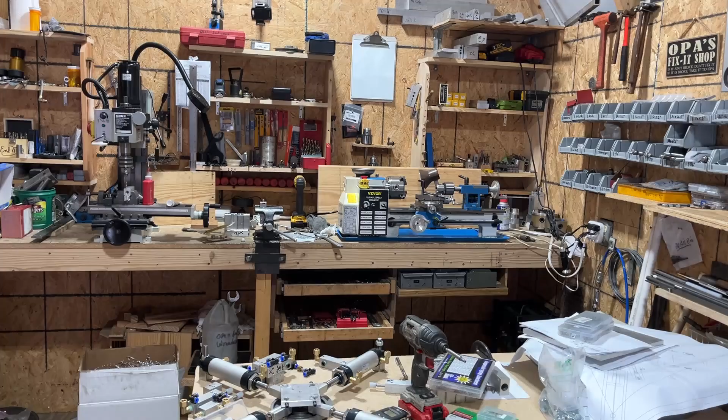Well, here we are in my shop now. And what do we got? 10 minutes after 8.

Looks like 20 degrees. Well, I'm not going to be in here very long.

Last night I was sitting in my recliner thinking, and I started looking back over some of my older videos. I got to thinking there had been a few times someone asked me about how I go about making my prototype engines, so I decided to go back and pull out the videos over the couple of months I was working on one of them. I decided to do the 4-cylinder one that I have on my lawnmower body right now.

I did some testing on it, so I've got some videos, and it's on there right now. I'm going to be working on it some more this spring. I'm going to put my pressure flow regulator on it, which I haven't had a chance to do yet, and see if it makes it any better with the new pressure flow regulator on it.

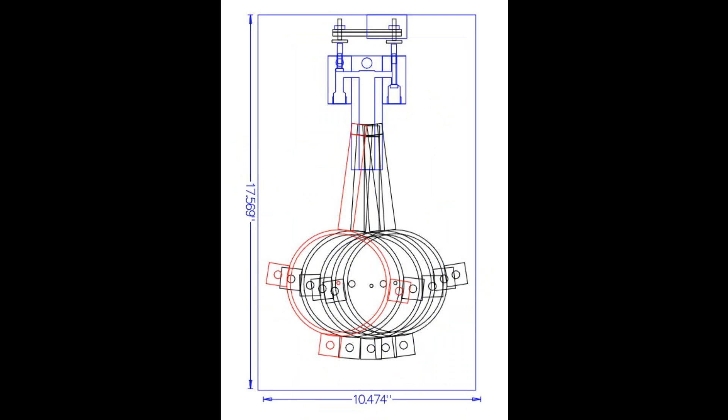Today I've been working on my valve head, and for me, getting this 1.125 inch bearing hole bored into it was quite a challenge for me.

I have a 4-jaw non-centering chuck, and I had already drilled the 1/2-inch hole and then wanted to center it and bore out for the 1.125 inch, and I had quite a time before I finally got it centered.

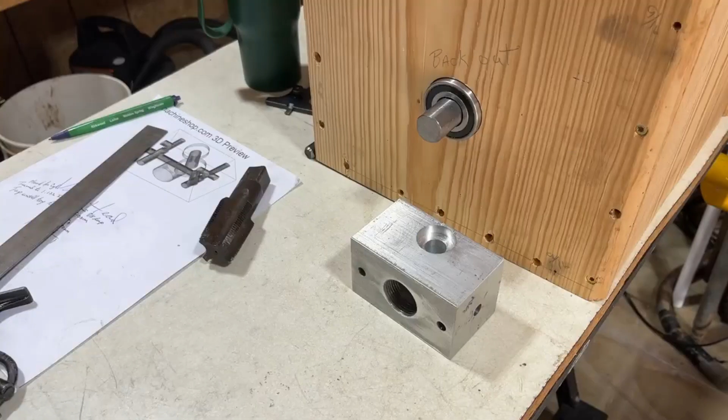Well, after a lot of checking and looking and making sure everything seemed to be right, I finally got the half-inch hole bored out to 1.125 inch so that the bearing fits in it now, and I think it works pretty fair. Goes in pretty easy.

And then I was able to drill out with a 15/16 and then bore out this hole to allow me to tap it for a 1-inch pipe.

Although this is just a test piece, but I did pretty good, except I'm not sure how I can get this tap in there straight up and down to make sure it's not tilted.

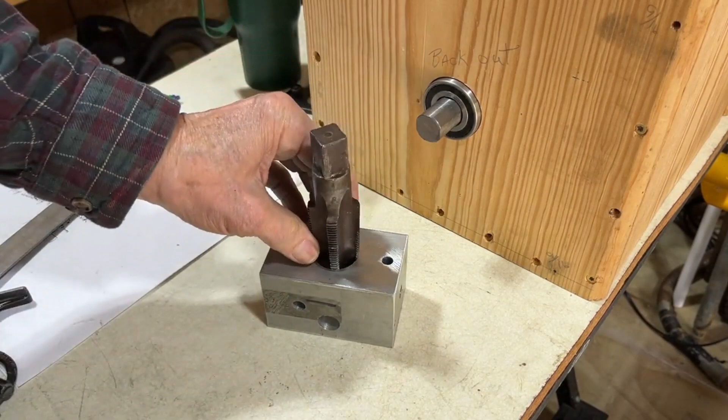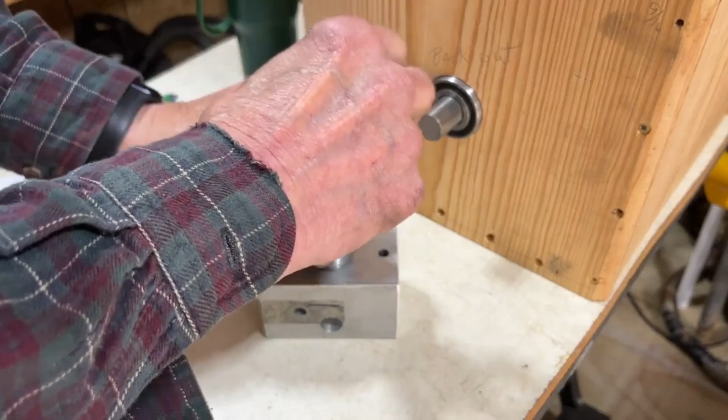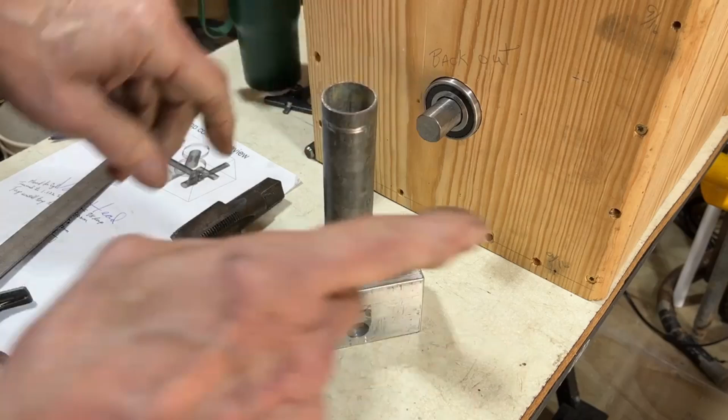This one, I didn't have it quite level in the vise, I think, and it came out a little bit crooked. I can screw the pipe in it okay, but if you've got a good eye, you can see that's not quite straight up and down. I think it's leaning this way a little bit, that way a little bit now. But I'll have to be more careful on the next one.

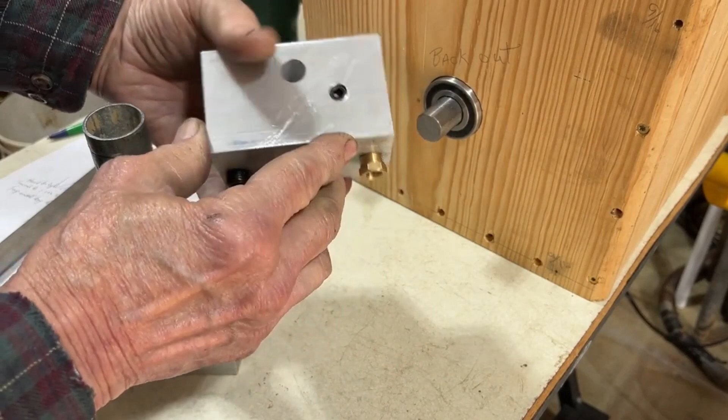This is the actual piece that I'll be working on, so I'll have to be more careful to make sure I've got that straight up and down when I set that tap on it to tap it.

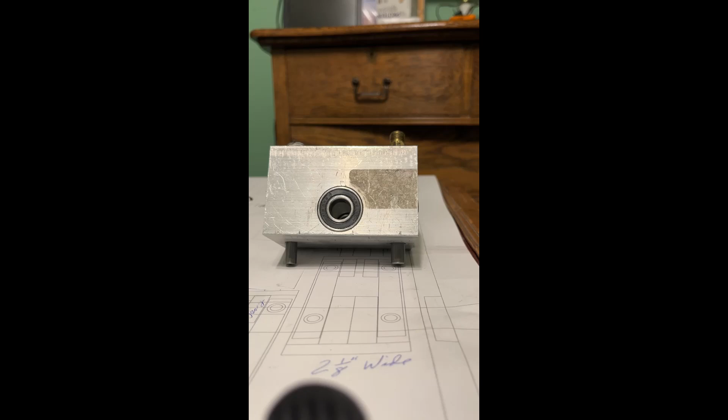I have one of my 4 valve head bodies finished, and I'll kind of show you what it looks like. This is where the rotator shaft will go through. It'll rotate back and forth.

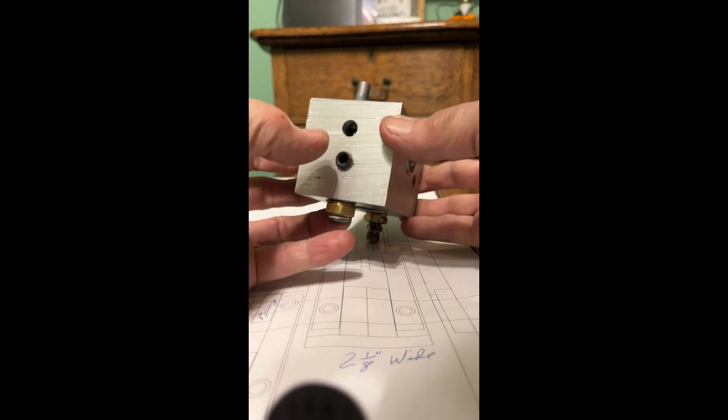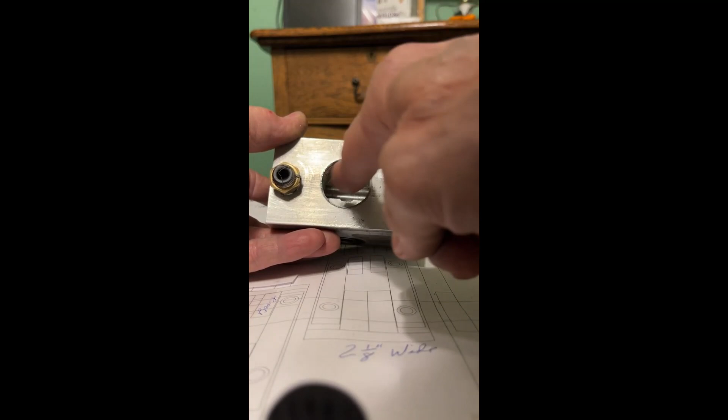These are the 2 valve stems, intake and exhaust. The exhaust will come out in this hole here. This plugged hole goes completely through down to this plug, and this hole goes through and meets this hole, and both of them come out into the cylinder that will be screwed into this hole here.

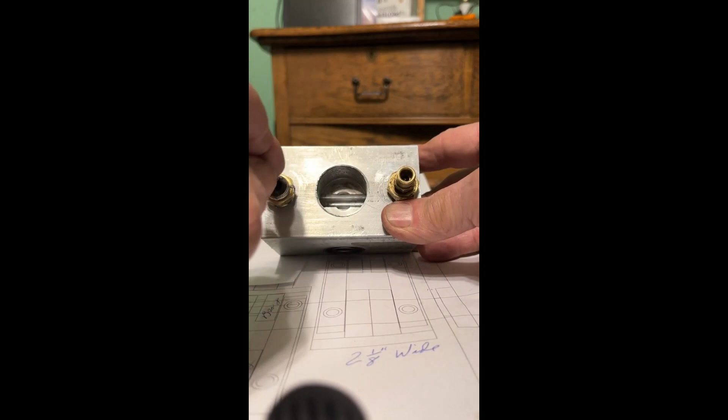So this plug joins this plug and this plug so that the air ends up coming out here. The air inlet goes here, and this just has to be plugged to allow the exhaust to go from the cylinder back through here. When this is pushed down, it opens this hole and allows the exhaust to come out through here. I'll show you in a minute what it looks like on the inside so you can see what I'm trying to explain.

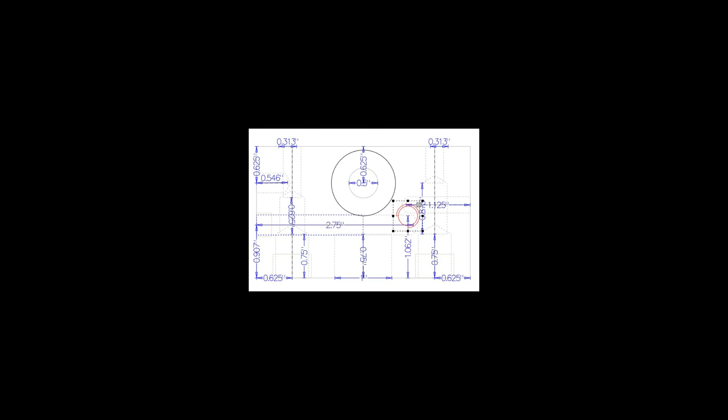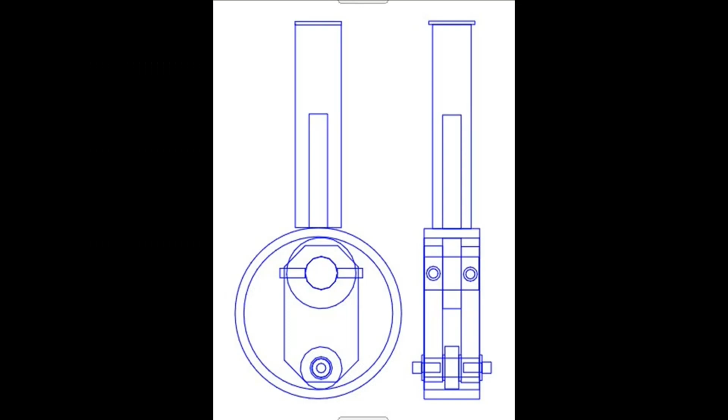I found that my design looked like it needed to have something that I can use to adjust the rotator inside the ring. I don't think I can make it tight enough without having some sort of adjustment. So in this next picture, this is the new design.

I'm going to cut an access hole or mill an access hole into the side plate on both sides of the bearings and notch the half inch hole on the bottom so that the bearing can be adjusted inside the ring once it's there.

I'll have to drill a hole through the end of it and tap it and put an adjusting screw with a lock nut on it so that it will be permanent.

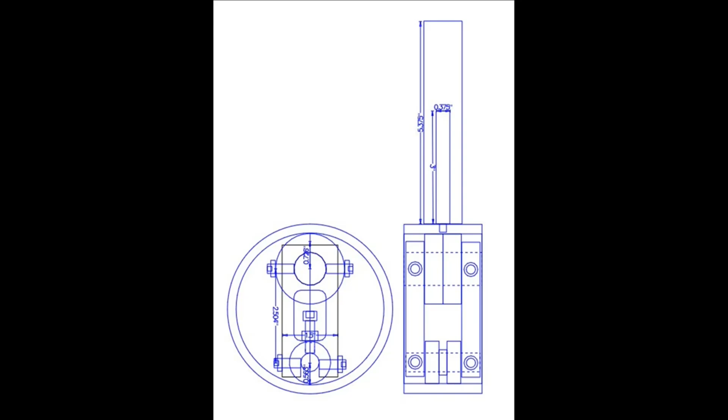And you can see in this next one how the notched out end is with the adjusting screw. I think that'll be fine.

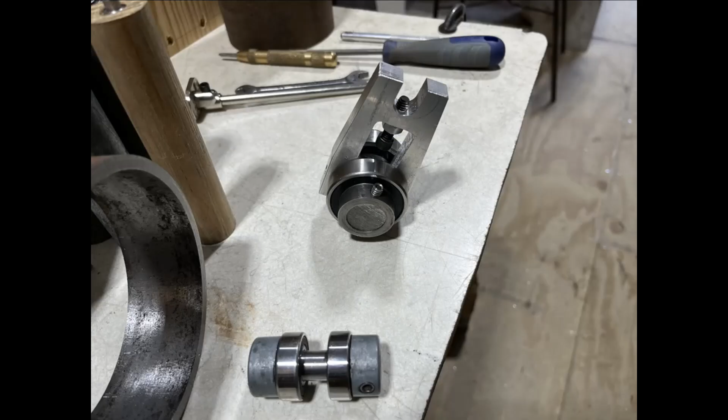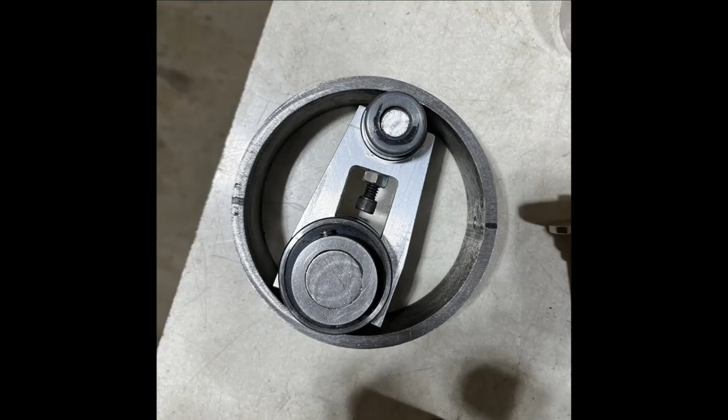I was able to get everything put together and tried it temporarily with this piece that I had already made from one time before. It's not exactly the same as it will be, but it gives you the idea of how it will be adjusted inside the ring once it's put together.

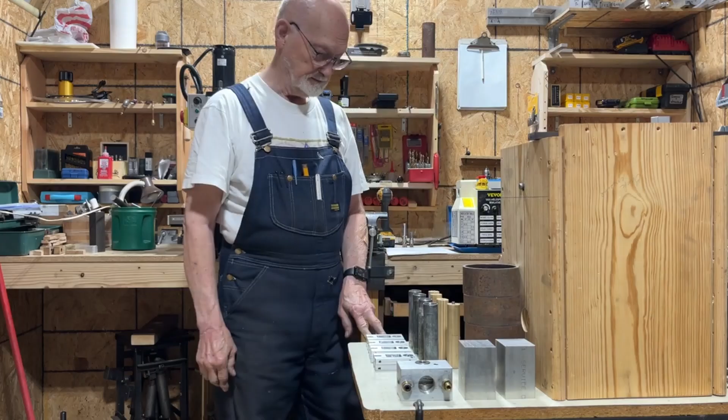I finally got all 8 of my driveshaft rotor modules made. They don't look maybe like much, but there's 8 different operations that has to be done. There's 8 holes.

3 of them have to be milled out, which takes quite a while, and then drilled and tapped for each set screw and for each quarter 20 that's going to be in it.

So far I've got my one head made. We got the 4 valve, the 4 cylinders finished. I made the design so that they just screw into the head, and as it rotates, then the cylinder goes back and forth to move the ring, which are these.

I don't have those finished yet. I've got to mill out the inside and mill off the outside, drill a hole in it, and each one of these will be welded to it, and that will go like inside of the piston.

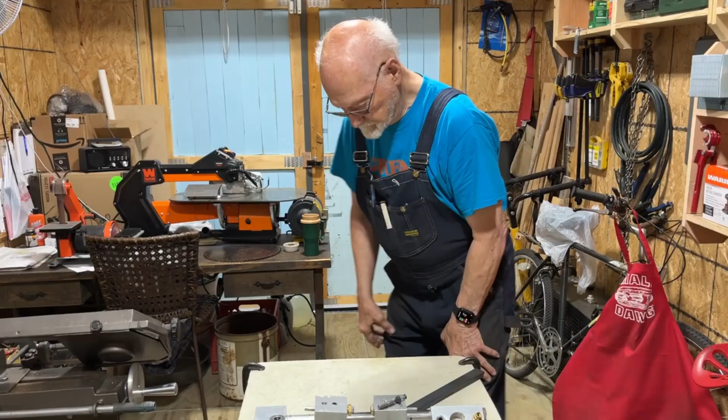I have all the parts completed now, and some of the assemblies that I need to put together first.

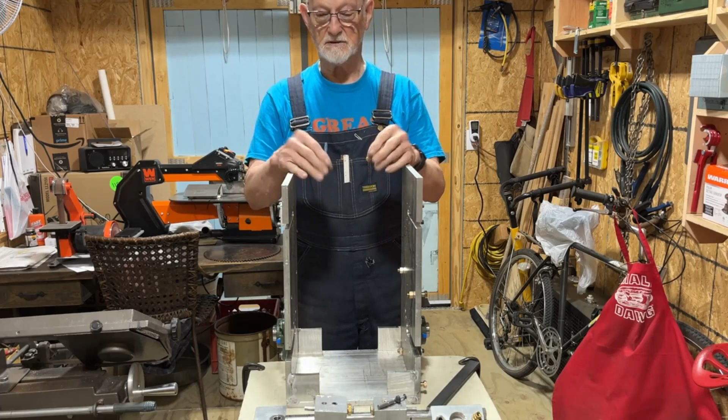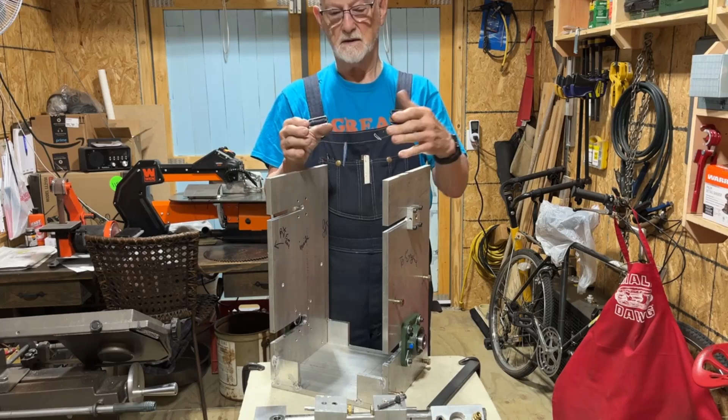This is the main housing that the completed assemblies will be put into. The reason for these slots is when I assemble the parts that go up on the top part of the engine, which is the valves, rocker valve heads. They will just be assembled outside on the workbench, and then these will be taken off and then just slide in, and then put the 2 plates back over to hold that in place.

Same thing for these on the bottom. This will be where the main drive shaft and the ring assembly and crankshaft rotor assembly is put into. You assemble it outside, slip it in, and put the bearings back on. Not much more to say about this.

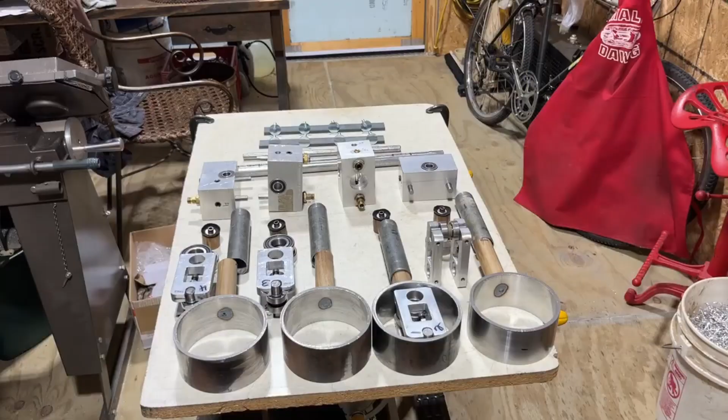So let's go ahead and take a look at my parts that I have put together and laid out. Okay, these are all of the parts that go into the engine.

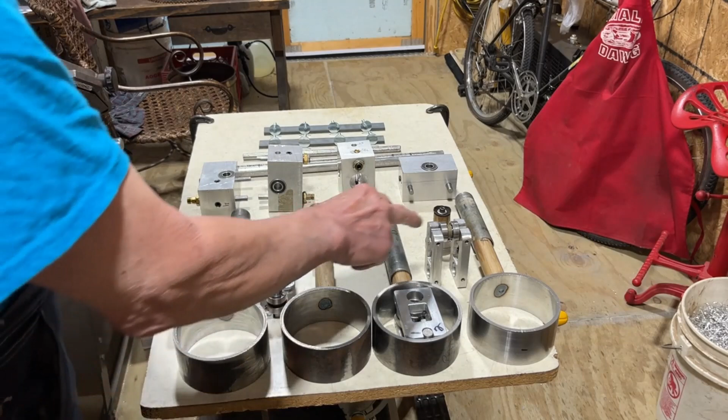This is the drive ring. These things are what I call drive shaft rotators. They go inside of each of the rings. They have 2 main bearings and then 2 smaller bearings that position it inside.

The 2 holes here are what goes over the drive shaft, and these rotate the drive shaft as they rotate. There's 2 set screws here, 2 set screws here that will position it on the drive shaft.

These rings are steel. The rotator assemblies are aluminum. These are the cylinders, and as you can see, it goes inside or over the top of the stem on the rotator ring.

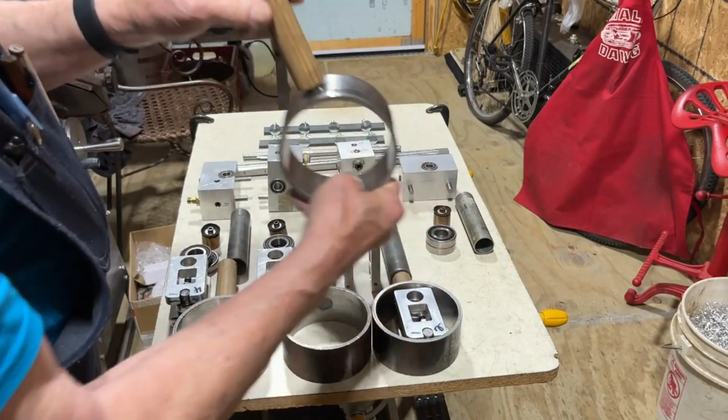This is a piston that goes inside, and it's a free-floating piston. So that means that when the engine is running, it'll rotate like so, up and down, and the piston is what pushes it up and down naturally.

And if you are accelerating or the engine is running, the piston is pushing down. If you stop accelerating or shut the air off, piston stops. If you're moving, the ring continues to go around up and down, but the piston doesn't move. That's going to save wear and tear on the seal.

Let's see. These are what I call valve head assemblies. There's two valves in each one. You have this is the intake, and this is the cylinder, and this is where the exhaust valve is inside. All you see on the outside is a stem, which gets pushed and pulled.

When you put air into it, this valve is shut. If this is pushed in, that lets air come in, come to the cylinder, push it down. When this is shut off, and this is shut off, the piston can't move, so you have to open the valve. That lets the piston push, or this rotator ring, push the piston back up into the cylinder and come out through the exhaust hole here.

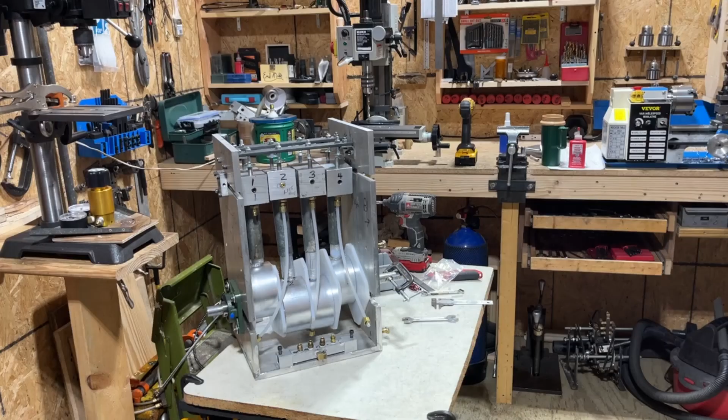Well, good morning again, today is another day. Yesterday I finished adjusting the valves and stuff, and then I started to make a system for holding the air lines and stuff. So I made a piece up here that will be for the 4 air lines and to hold the bracket down.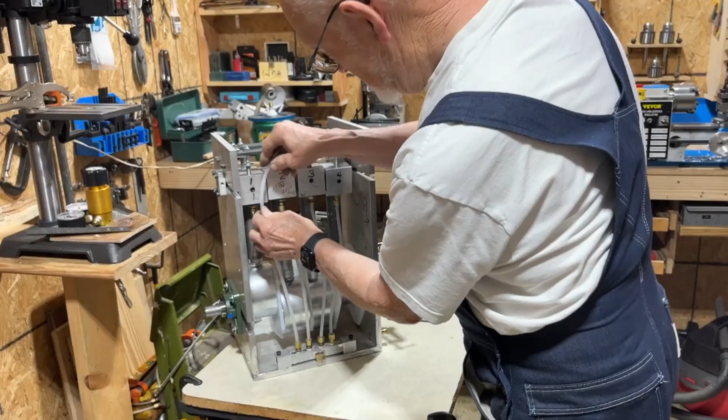Let's get in there. That looks like that. Yeah.

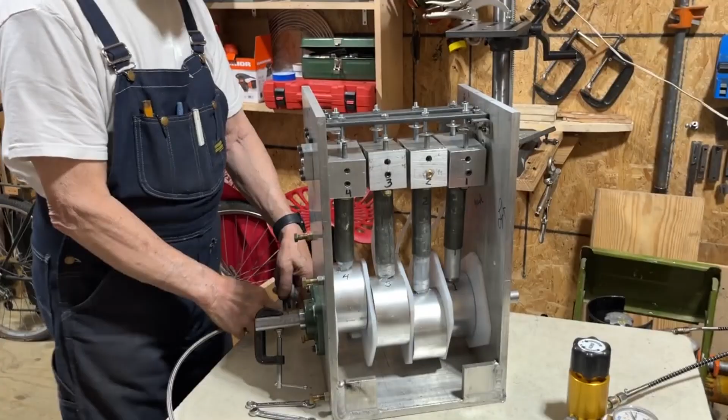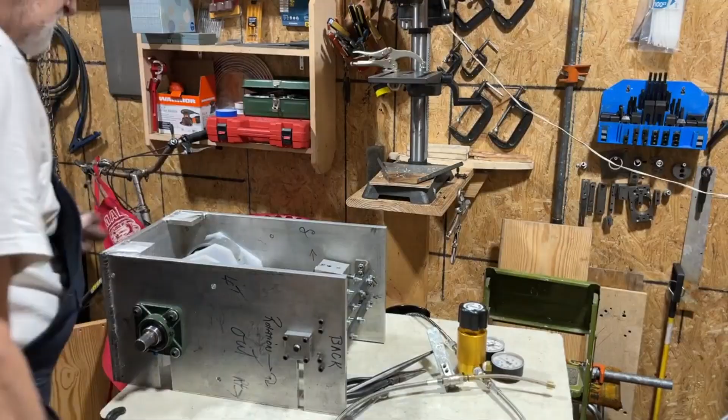Okay, I've decided that the valves are leaking, so I'm going to have to fix them. The last couple of days I've been working on all the valve heads. I did some testing with different pressures, and I found that the valves and the seats I had been using with the faucet washers were not holding up under a little bit higher pressures. If I got up around 300 psi, one of them pushed the valve stem actually through the seat, so I couldn't have that.

So I took these all back off, took them apart. I made some modifications where I'm using a tapered 5/16 bolt, and I machined it down to be a valve stem, and I countersunk the seat inside the valve to match the tapered valve head. Once I did that, I got things pretty well sealed up where they don't seem to leak, and I don't have to worry about the higher pressures.

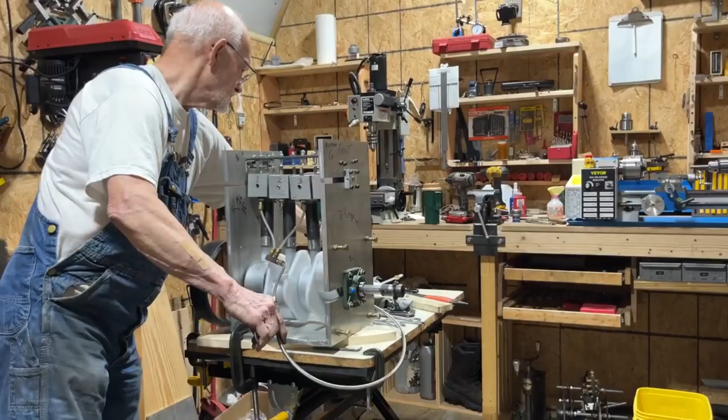So after I worked on that for a while, I wanted to see again with running just 1 cylinder how many pounds it would pick up total. So I ended up getting enough metal together to make 50 pounds. And then I set my air pressure on 75 psi, and I'll show you then what happened with how much it would pick up.

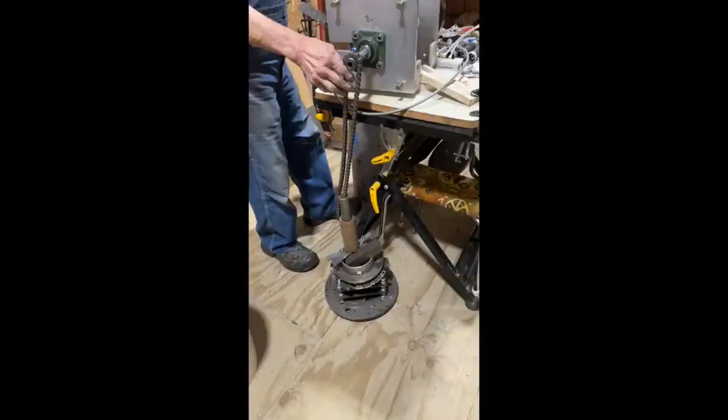Okay, it's on 75 psi. Now I've got the air open. And if I move it to where it takes off, 75 psi picks up 50 pounds.

So 75 psi on 1 cylinder would pick up 50 pounds, and still be able to pick up more if I had added more to it. I was rather happy with that, it's got pretty good power. And for the most part, I couldn't detect any leaks anywhere, so that's also a good sign.

I was going to take the 4-cylinder and put it on my lawnmower body. It's not very pretty, but it's got 4 wheels, a steering wheel, and a seat, and it's got a foot pedal for gas or for air. So I'm ready to try it, I'm going to see what happens.